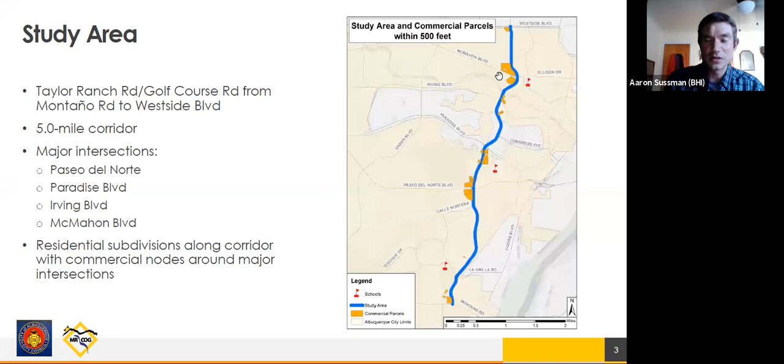Part of what that creates is this tension between pedestrians, bicyclists, and transit users trying to access these destinations along the corridor, and residents and motorists who are using the corridor in part to access the regional transportation network. We've got a small group, so we're going to skip the interactive polling and allow for more time for questions at the end. But just to summarize again a little bit more about the purpose and need for this study.

This is a corridor that connects residential, commercial, and public land uses. We've got all these competing interests and competing users. At the same time that we have high travel speeds along the corridor and people trying to access these commercial destinations and public uses, places, parks and open spaces and Petroglyph National Monument, we have high vehicle speeds, but we also have somewhat incomplete pedestrian and bicycle facilities across the corridor.

We'll talk about that a little bit more later in the presentation, as well as the fact that in a lot of parts of the corridor there are rather limited opportunities to actually cross Golf Course Road. We've already heard from talking to members of the public and neighborhood associations how much of a challenge that is, and that's something we'll come back to tonight as well.

What we hope to do with this study is consider how we balance the reality that it is an auto-oriented corridor carrying a lot of vehicle traffic, with the desire to create some level of community identity and a Main Street character along the corridor. So how do we do that? Applying complete streets principles and incorporating bicycle and pedestrian infrastructure, addressing safety concerns, while again balancing the need for people to travel along the corridor by private vehicle as well.

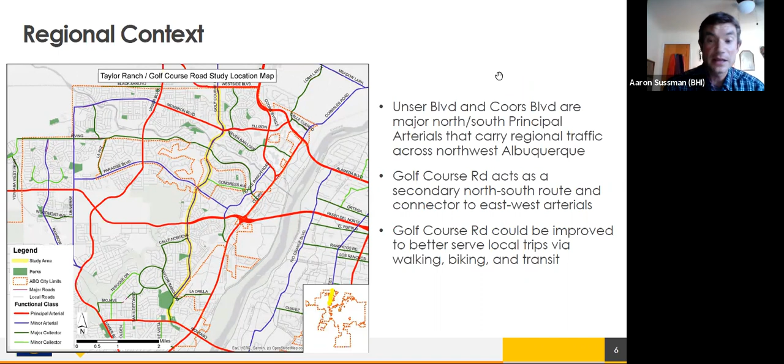Part of our interest, though, is that given it's not just a major thoroughfare like some other corridors, it provides some opportunities to create a little bit more of a neighborhood or community character along the corridor, and allow for more trips to be taken by walking, biking, and public transit, and to do that in a more comfortable way. So this is a complete streets study, and one of the things we wanted to do at the beginning of this session was to define complete streets.

For those of you who aren't familiar with this concept, Complete Streets is really more than anything an approach to transportation planning that's related to how roads are designed and how they function. The idea is that roadways should be safe for all modes of traffic, not just motorists, and accessible for people of different needs and abilities, for people who want to walk and bike along the corridor. It doesn't always mean that we're just going to bring traffic to a standstill.

I wanted to show an example on the right part of the screen here from Martin Luther King Boulevard between University of New Mexico and downtown, where improvements made through striping and some other minor modifications allowed for improved bike facilities and more distance between pedestrians and motorists along the corridor. But we still keep the same number of driving lanes and the same types and locations of turn lanes. There's still opportunities to really make this corridor work for other users. So that's the concept behind Complete Streets.

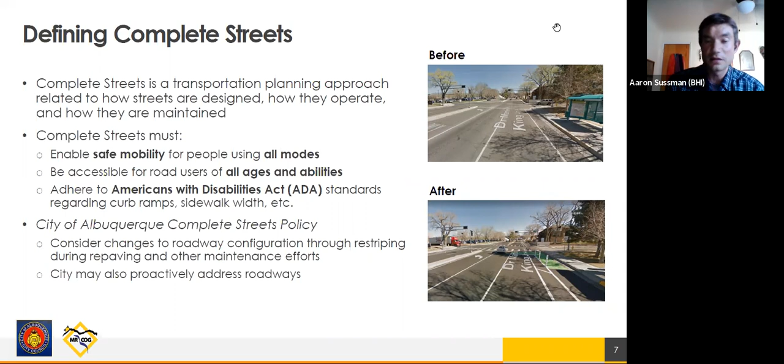This project is in line with the City of Albuquerque's Complete Streets policy, which was updated a couple years ago. The idea of the policy is that there's an opportunity for the city to consider how to incorporate better facilities for bicyclists and pedestrians as part of roadway improvement and repaving efforts. But the city can also address roadways proactively in places like Golf Course Road, where we know there are safety challenges, high travel speeds, and conflicts among different user groups. So that's the logic and concept behind the Complete Streets approach to this project.

My expectation is that everybody's familiar with at least parts of Golf Course Road, but one of the things we wanted to do was give everybody a chance to see the whole corridor from south to north. So I'm going to turn it over to my coworker, Alex Waltz, to do something of a virtual tour along the corridor. Go ahead, Alex.

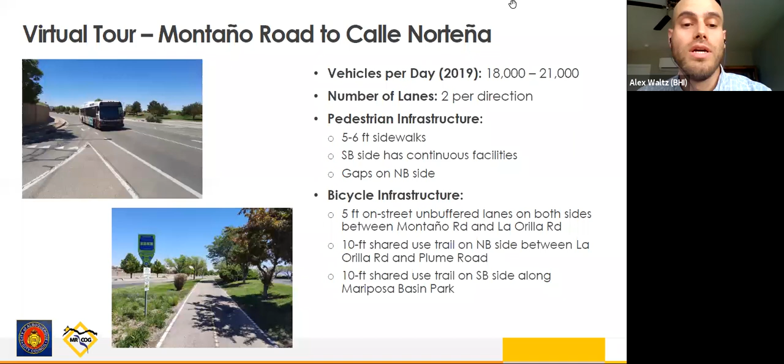Thanks, Aaron. Hi everyone, Alex Waltz, I'm a planner with Bohannan Huston. Like Aaron said, we wanted to walk you through different aspects of the corridor, going from the southernmost portion all the way to the northernmost portion.

The first segment of the corridor, between Montaño Road and Calle Norteña, carries generally between 18,000 and 21,000 vehicles per day. Note that these vehicle figures were collected prior to the beginning of the COVID-19 pandemic. This segment has two travel lanes in each direction, separated by a median. The pedestrian infrastructure generally consists of 5 to 6 foot wide sidewalks. The southbound side has continuous facilities, but based on our analysis, we found gaps on the northbound side.

The bicycle infrastructure is a mix of on-street and off-street facilities. There are 5 foot on-street lanes on both sides of the road between Montaño Road and La Orilla Road, but north of La Orilla these lanes disappear. They could be considered replaced by a 10 foot wide shared use trail located only on the northbound side between La Orilla Road and Plume Road. There's also a 10 foot wide shared use trail on the southbound side associated with Mariposa Basin Park, although this trail does not connect to existing curb ramps at Kachina Street.

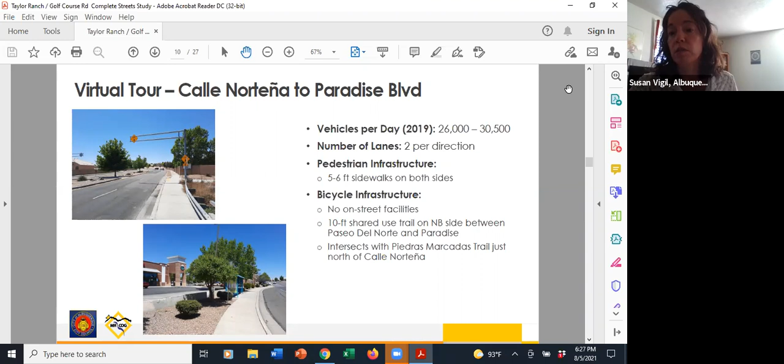There's this extensive trail on the northbound side, but crossing Golf Course isn't well facilitated. There is a pedestrian crossing at La Orilla Road for that trail, but it requires crossing a couple different slip lanes and the width of the road. So depending on the bicyclist or pedestrian's comfort level, it could be a challenge. Other than that one signalized intersection, there aren't any other opportunities to cross and access this trail.

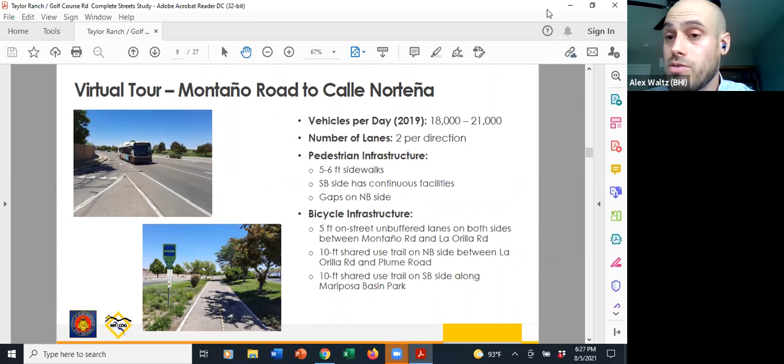Thanks for that. Now moving north between Calle Norteña and Paradise Boulevard, this portion of the corridor has slightly higher traffic volumes, roughly 26,000 to 30,500 vehicles per day. Again there are two lanes in each direction separated by a median, as you can see in this image in the upper left. The pedestrian infrastructure consists of 5 to 6 foot wide sidewalks on both sides of the street, and this segment has continuous facilities for pedestrians.

The bicycle infrastructure does not include any on-street facilities, but there is a 10 foot wide shared use trail on the northbound side of the road between Paseo del Norte and Paradise Boulevard. In addition, this portion of the corridor intersects with the Piedras Marcadas Trail just north of Calle Norteña, which you can see again in this image in the upper left. It's a designated crossing, although it doesn't have any crosswalk markings.

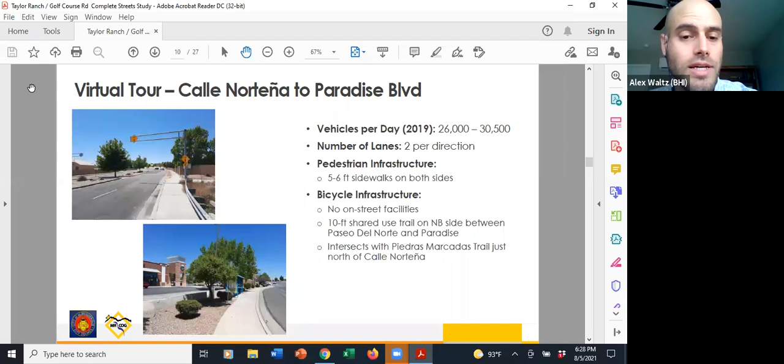Is it the portion of the corridor that's controlled by the county? Yes, exactly. So this portion between Paradise and Irving is owned by Bernalillo County.

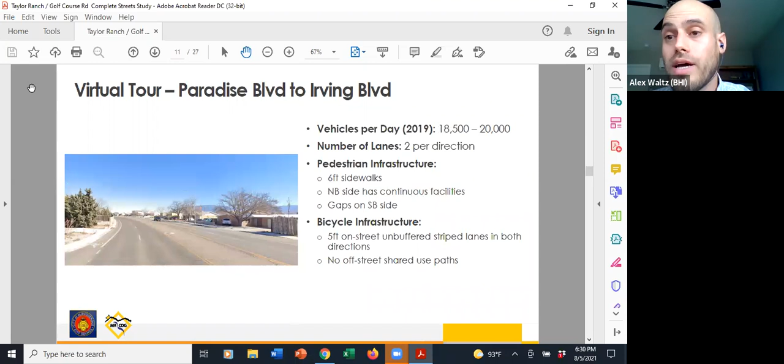So now the northernmost portion of the corridor between Irving Boulevard and Westside Boulevard at its peak carries the most vehicles throughout the corridor, ranging from roughly 20,000 vehicles per day to 34,000 vehicles per day. Again, there are 2 lanes going in each direction, but in contrast to the previous segment, they are separated by a median here.

Pedestrian infrastructure consists of sidewalks ranging in size from 4 to 6 feet wide. The southbound side of the road has continuous facilities, but we did observe gaps on the northbound side. The bicycle infrastructure here consists of 5-foot on-street striped lanes going in both directions, although at some points along this segment the lanes are a little bit narrower than 5 feet, and there are no off-street shared use paths.

This portion of the corridor does have a significant grade change, which from our discussions with city staff, we've learned is where speeding is most prevalent because of that grade change. So as drivers go down and up the hill, depending on what direction they're coming from, generally that's where we see the highest speeds.

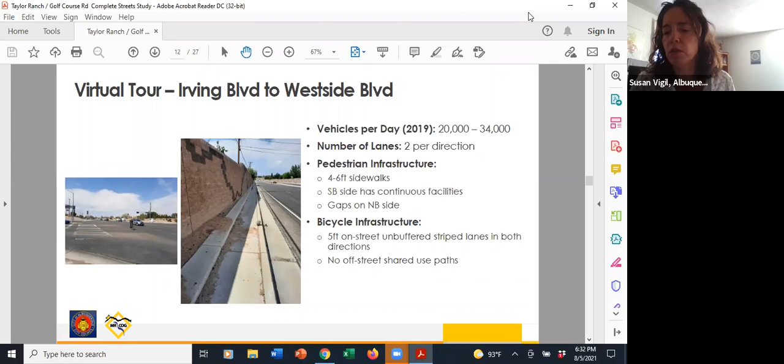And yeah, so that's the tour. I'll turn it back to Aaron to talk about existing conditions.

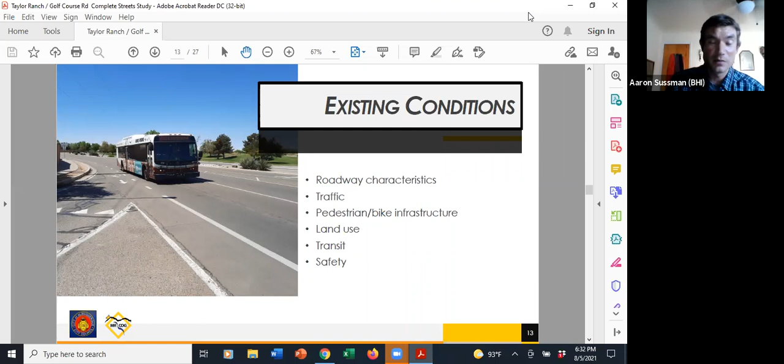Great, thanks Alex. So we wanted to dig into existing conditions at a little bit deeper level, starting off with an overview of the conditions along the corridor, and then really starting to diagnose what sort of challenges we face. And when we get into the recommendations and design component of the project, what should we be focusing our energies on?

So let me start by summarizing the roadway conditions. As Alex mentioned, the traffic volumes range from 18,000 to 34,000 vehicles per day. The corridor is consistently 2 lanes in each direction across the entire corridor, and the posted speeds are about 35 to 40 miles an hour, depending on the segment. What we do see, though, is that there are some variations in things like access along the corridor, and the type of facilities or infrastructure in the middle of the road.

As Alex pointed out, there are some portions of the corridor with raised medians, other portions with center turn lanes. Access into residential areas or to commercial areas is generally limited, with the exception of the area in and around between Cayo Montaño and Paradise Boulevard in particular, and the Paseo del Norte intersection.

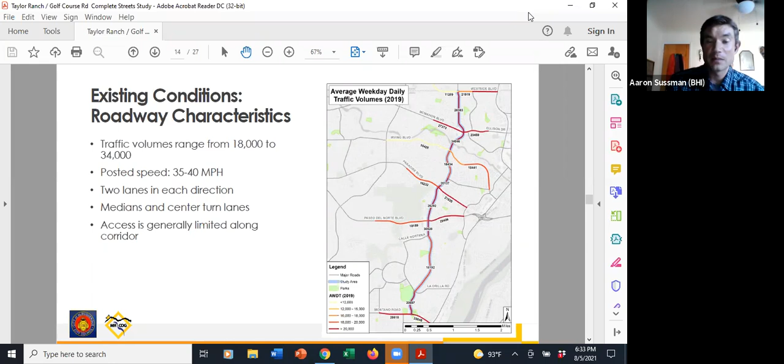This is a corridor that carries a lot of vehicles to these east-west arterials. One of the things we notice is that there's a lot of variability in traffic volume from segment to segment, which means we have inconsistent conditions from segment to segment. That becomes a challenge in thinking about what modifications one might want along the corridor from a vehicle user standpoint.

At the same time, we also observe a decent amount of congestion along the corridor, and I'm sure residents observe this. We have this challenging set of phenomena where we have high vehicle speeds during parts of the day depending on the direction, but we also have portions of the corridor that can get pretty congested, especially approaching the major intersections.

What that means is that there's more cars on the road at certain times of the day than the road was intended to handle. One of the consequences is that results in delay, especially approaching the major intersections where people need to sometimes wait for multiple signals to make those east or west turns.

At the same time that we have conditions approaching or exceeding congestion or capacity levels today, traffic volumes are expected to grow by 5 to 10% over the next 20 years. So we do expect to see a little bit more traffic over time along this corridor.

How much is the capacity being exceeded currently? In some cases, it's something like 15%. Again, that's just 15 to 20%, and that's really confined to the peak periods.

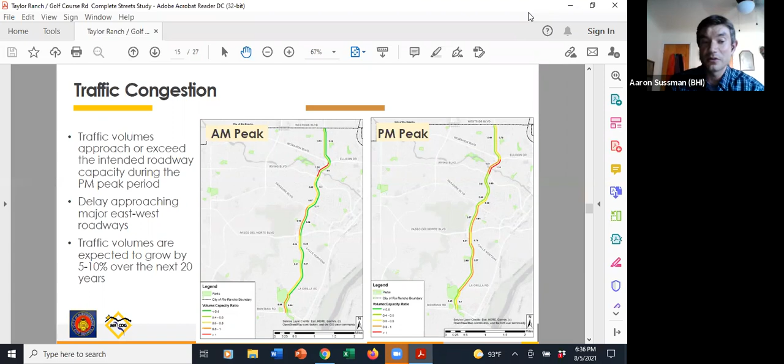One of the other major challenges with the corridor in terms of managing traffic is the fact that we have these commercial nodes around major intersections, which is important in terms of providing services in the area, but it also creates conflicts at the locations that tend to be congested during the peak periods anyways.

One of the things that's been a focus of our efforts, and we're hearing repeatedly from members of the public, are concerns about this particular shopping plaza, the Petroglyph Plaza to the southwest corner of Paseo del Norte, where the Starbucks in particular is a culprit, and the queues associated with the drive-through will spill onto Golf Course Road, create delay, create all sorts of unsafe conditions and poor sight lines. So that's something we're very much focusing on.

So we have this delay associated with the intersections. We also have challenges with the grade of the roadway, as Alex mentioned. The farther north we go along the corridor, we have these steep descents and ascents in and away from the Calabacillas Arroyo. We also have fairly long distances and stretches of the corridor between signalized intersections.

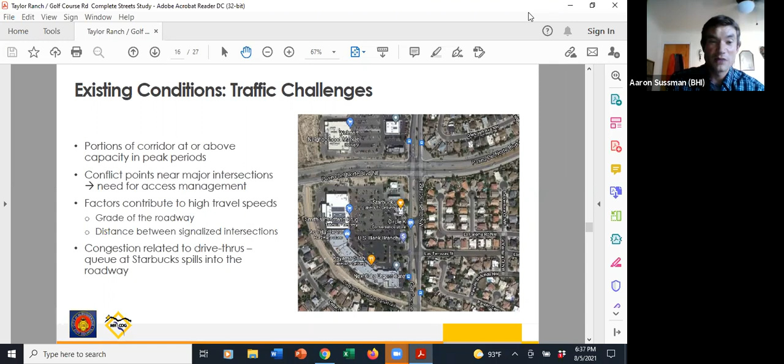Susan, you were asking about that earlier. Not only is that an impediment for pedestrians, but long distances between traffic signals creates opportunities for people to speed up in their vehicles. So again, a broad range of challenges along the corridor.

There have been a lot of projects identified or proposed both along Golf Course Road and intersecting with it. But at present, we have significant gaps along the corridor, particularly between La Orilla and Paseo del Norte, where there are no on-street bikeway facilities at all, and no multi-use trails in that stretch either.

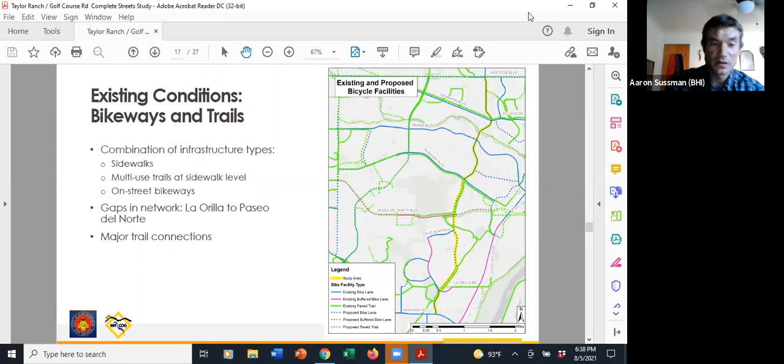This corridor has a mix, as Alex mentioned, of sidewalks, multi-use trails at sidewalk level, and on-street bikeways, plus some major east-west trails that connect with Golf Course Road, including along Paradise Boulevard and the Piedras Marcadas Trail south of Paseo del Norte and north of Calle Norteña. But we also have long distances between signalized intersections that make it hard for bicyclists and pedestrians to access the commercial areas along the corridor.

Where we do have on-street bikeways, in many cases they're narrow with no separation for motorists. That creates conditions where motorists are going 40 plus miles an hour, with high vehicle volumes and not much separation between bicyclists and traffic, making it pretty uncomfortable for anybody walking and biking along stretches of the corridor.

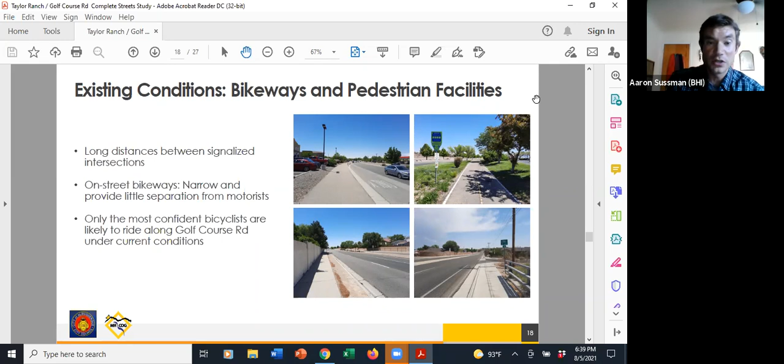What that means is that only the most confident bicyclists are likely to ride along Golf Course Road under current conditions. That's different where we've got multi-use trails like the one in the upper right, or the trail at sidewalk level approaching Paradise Boulevard.

The other dynamic along this corridor is this interesting mix of residential activity and commercial nodes. We've got long stretches of subdivision walls facing Golf Course Road. We also have the stretch between Paradise and Irving Boulevard in the unincorporated county portion, where we've got residences and direct driveway access from the corridor.

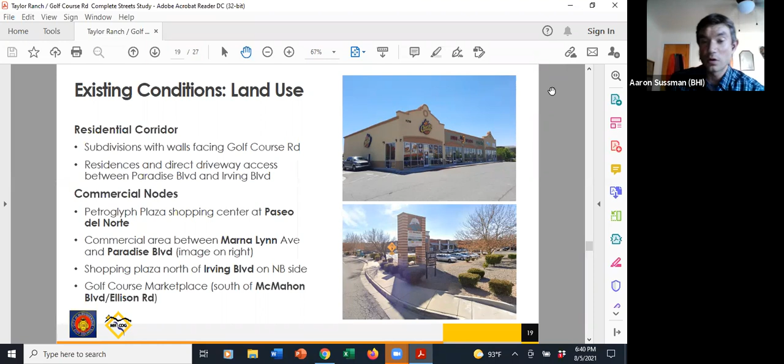This long residential corridor is punctuated by commercial nodes, which are real focal points in the Northwest Albuquerque area. I mentioned the Petroglyph Plaza, but there are other commercial areas along the corridor that generate a lot of trips, and ideally are places where we could create more opportunities for people to walk and bike.

We also need to recognize there's a decent amount of transit service along this corridor. There's a major transit route, Route 157, which operates every 30 minutes. It goes from Northwest Albuquerque and the Northwest Transit Center off Ellison Drive, down Golf Course to Montaño, across to Louisiana, connects to Uptown, and ultimately to Kirtland Air Force Base.

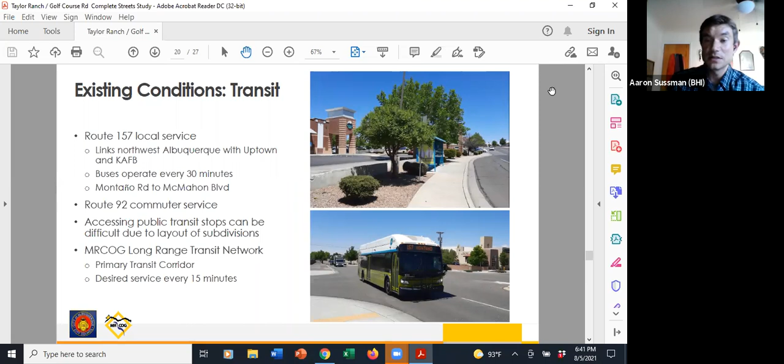There's also a commuter route that only operates during morning and evening peak periods, connecting to downtown and UNM. But one challenge along this corridor is, again related to land use, that because we have a lot of subdivisions with walls facing the corridor, accessing transit is a little bit limited at this point.

One thing we see is a pretty strong correlation between crash locations and conflicts at access points, particularly around the Petroglyph Plaza shopping center. There's also some distribution of crashes along the corridor, but again the greatest concentration and most severe crashes are between Calle Norteña and Paradise Boulevard.

We do have data showing a number of bicycle or pedestrian involved crashes, including multiple crashes at Montaño Road and fatal bicycle or pedestrian involved crashes at Paseo del Norte and Irving Boulevard.

At this point, I wanted to recap a few comments and concerns we've received so far before getting into what we make of all this information. One recurring theme we've heard from comments in public meetings and submitted through the website is that pedestrians definitely do not feel safe walking along the roadway.

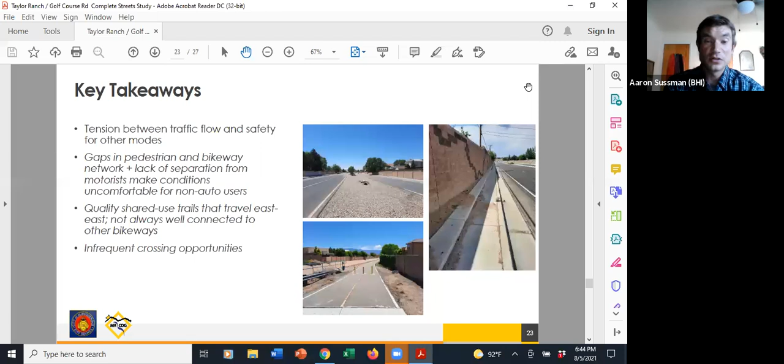One other observation, and I know we've repeated this a number of times, but it's worth mentioning again: the lack of crossing opportunities along the corridor. There's a real opportunity for improvement there, especially if we're trying to encourage more trips by bicyclists and pedestrians.

From a more integrated land use and transportation side of things, this is a corridor that's interesting because we've got these building blocks - pieces of bicycle and pedestrian networks, and retail and service destinations along the corridor that people are accessing. So how can we improve those facilities? That's something we'll talk about more this evening.

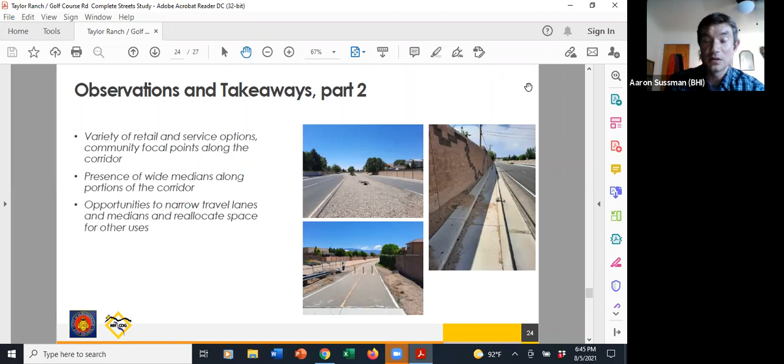One of the things we observed that creates an opportunity is that there are wide medians along the corridor - stretches where the travel lanes are wider than recommended in the city's design standards. So there may be opportunities to narrow travel lanes and medians along the corridor and reallocate that space for other users, creating separation between motorists and bicyclists and pedestrians.

But the shopping plazas, the commercial nodes along the corridor - there's parks, a community center, other destinations that residents of Northwest Albuquerque wish to access - it would be nice to provide other options for people to access those sites without getting in a car. So what does that look like?

There's two angles to this: one is bringing people to those destinations, and the second is whether there are opportunities to make improvements within those commercial nodes or shopping plazas. From a transportation standpoint, bringing people to those commercial centers, if there's an opportunity to reallocate space for bicyclists, pedestrians, or transit users, that would have the dual benefits of slowing down traffic to some degree and creating safer, more comfortable conditions for bicyclists and pedestrians.

If sidewalks could be widened, if we could put in landscaping and buffers, or wider bike lanes and buffered bike lanes, to again create more separation and more comfort level. One of the consequences of those things too would be reducing travel speeds a little bit in places where we observe speeding and racing.

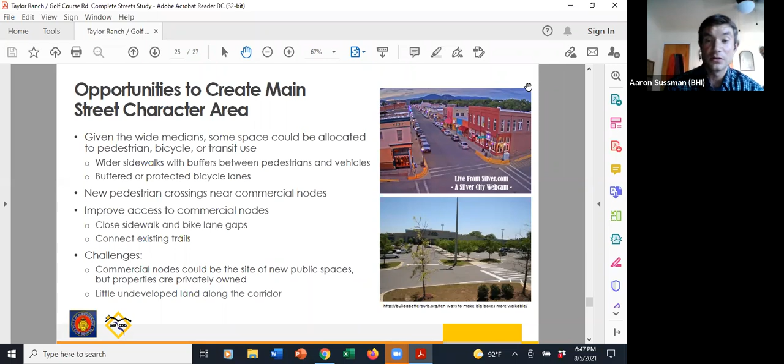So at this point, we wanted to let you know where we go next and then open it up for questions. Again, this is our review of the existing conditions analysis and our first set of thoughts about what it all means and how we turn this study into a coherent set of recommendations. Then we'll present our more fleshed out recommendations and design concepts at a second public meeting in October, and produce a draft report and recommendations document in October or November of this year.

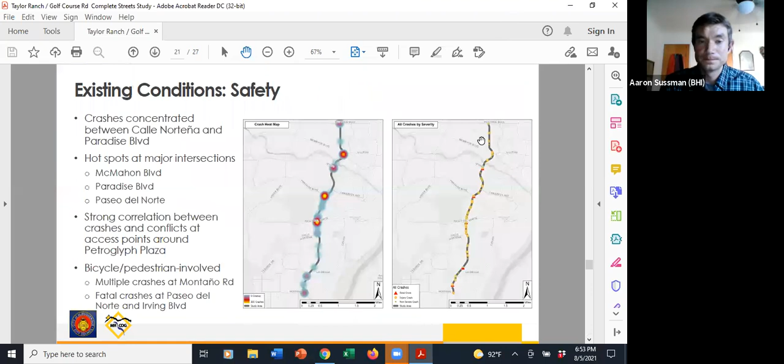There are a number of schools along Golf Course Road for students to walk to, or certainly near Golf Course, where students would use Golf Course to access the schools.

So that's being considered in your pedestrian analysis. Absolutely, those are the types of pedestrian generators that we'd like to make sure to accommodate as safely as possible.

I live in the valley and I've seen real little children walking. I think that's not really safe, but I guess their parents trained them enough that they feel it's all right - like 7-year-olds with their big brother. But if it is, the point is people make that choice for whatever reason - they're trying to get to work and they think their kid is trained enough or conscious enough to make it.

How do we make the streets safe as well? I think just to build off that point, Susan, one thing we know from various studies is that children generally have a more difficult time judging appropriate gaps in traffic, so they might not understand as well as an adult when a safe time to cross is.

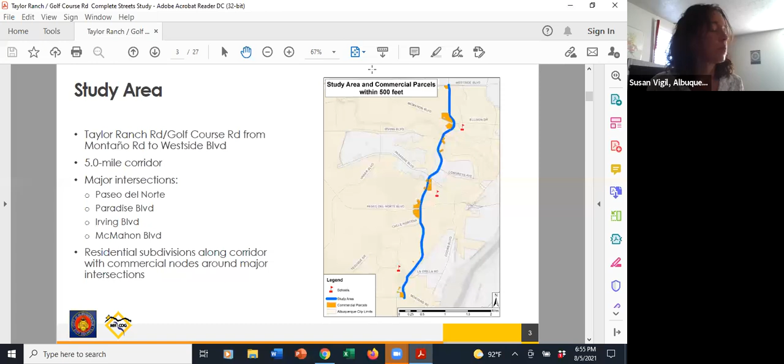That's interesting. I think they do it in Japan. Oh, interesting - if you wouldn't mind, if you have any pictures available, you could send them to us, that'd be great.